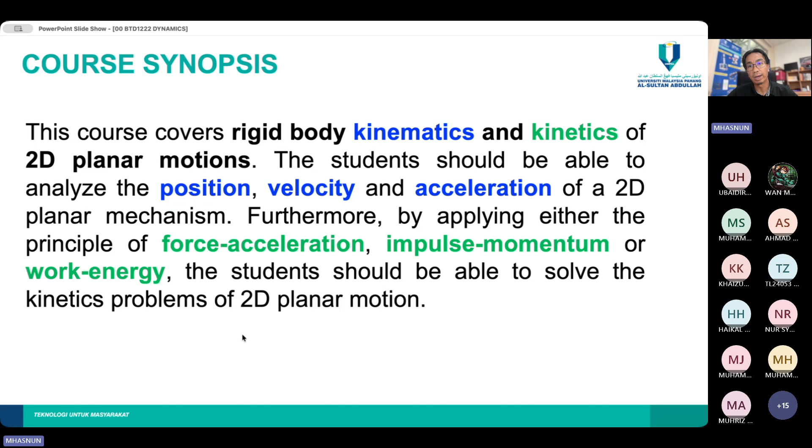If you read to the end, it says solve the kinetics problem of two-dimensional planar motion, meaning that in this class we will only focus on two-dimensional problems. We will not go into 3D problems. You will be calculating the problems in this class and in the test referring only to the X and Y axis. Basically, we are talking about two-dimensional problems.

As I mentioned earlier, this class is divided into 3 chapters, or course outcomes. The expectation is that when you finish dynamics, you will be able to understand and achieve these 3 outcomes.

The first outcome will cover kinematics, the character of motion. We will analyze linear velocity and acceleration of a point, and also angular velocity, which means the rotation component, and angular acceleration of the remaining links.

This is the difference compared to dynamics that you learn in diploma. Dynamics in diploma only involves linear velocity and acceleration, but in dynamics for degree level, we have another 2 parameters, which are angular velocity and angular acceleration.

Angular velocity is given by the symbol omega. It looks like a W, but it is called omega, a Greek letter. Angular acceleration is given by the letter alpha. Throughout the class we will see a lot of these symbols: linear velocity V, linear acceleration A. So you need to know V, A, omega, and alpha. These are the 4 main parameters that we will calculate in the class.

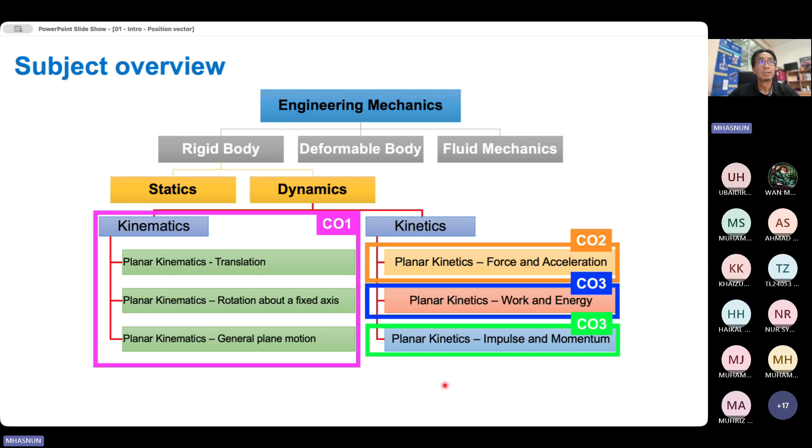Why do we learn rigid body planar motion? Because in many mechanical engineering branches, machines, or mechanisms involving engineering work, you can see such motion. For example, this is a simple planar rigid body motion where you have a rotating object, a rotating wheel.

And you have another point that is moving left and right. Altogether this belongs to planar rigid body motion. This cannot be treated as a particle because it has rotation and motion left and right—there's a wheel rotating. In particle dynamics, which you learned in diploma, there is no rotation motion.

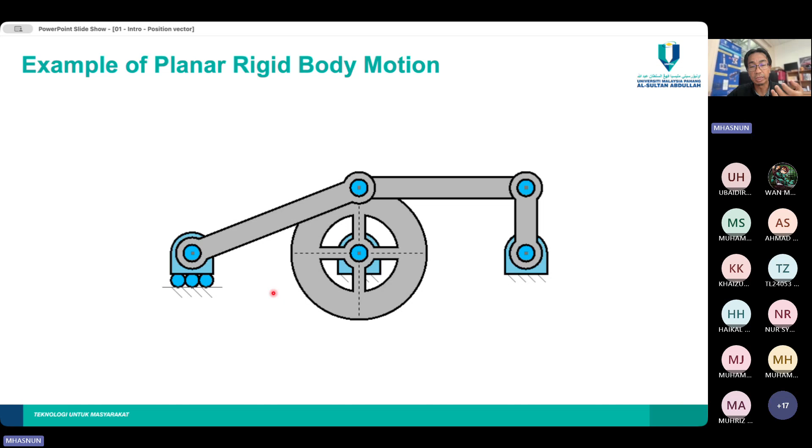Another example of this kind of mechanism is the crank motion in a car engine. The crank is moving up and down—the bottom part is rotating, this piston rod is also rotating, and the piston itself is moving up and down. This is similar to the motion shown in the previous slide.

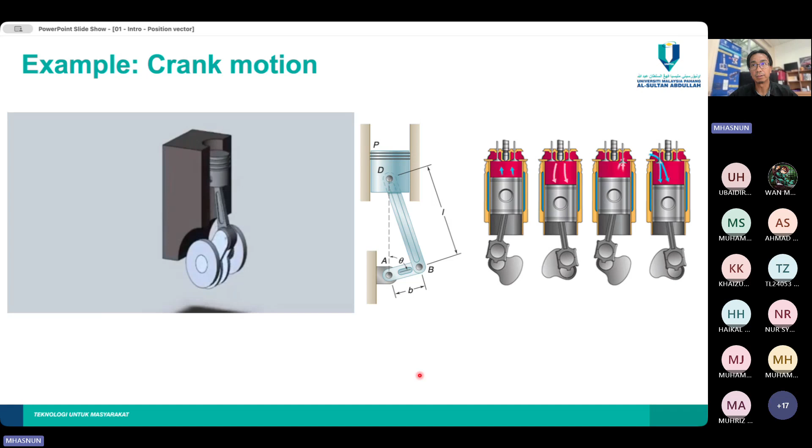So there are many motions in engineering machines that involve rigid body motion. That is why we need to learn dynamics.

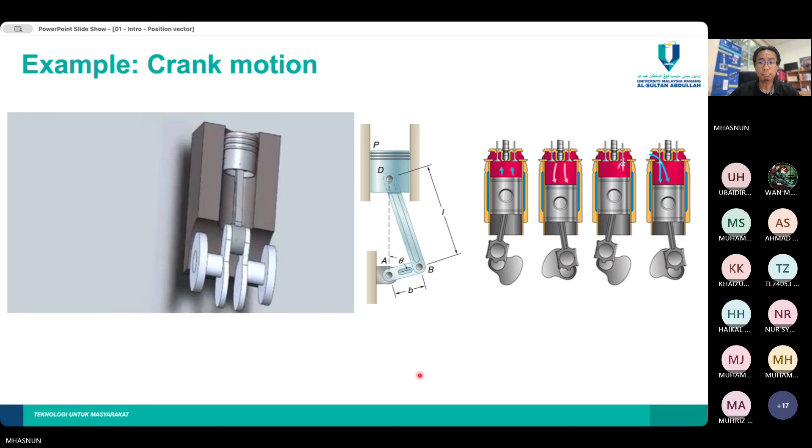Before we go into position vector, there are several things you need to be familiar with. The first and very important thing is trigonometry. I think you have learned this in mathematics, probably during your SPM, or maybe in mathematics at UMPSA.

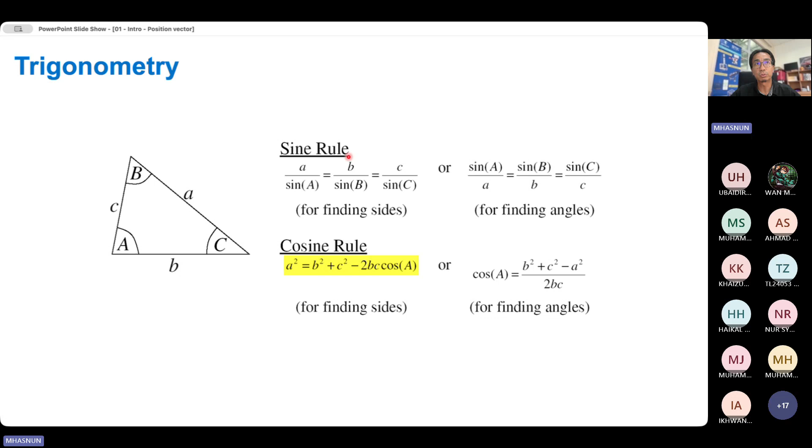So if you are making your notes now, please make sure you write this down. Sine rule is very important, Pythagoras theorem is very important, and trigonometric ratio is very important. All three rules are very important for you to get the length later when solving problems. Cosine rule is quite rare to be used in dynamics, and for finding angles you just flip the equation - also not very common. The most common one is using sine rule.

In this chapter we will also use a lot of vectors. I hope you know what a vector is. In mathematics or physics quantities, we have scalar and also vector. So what is the difference between scalar and vector? Any idea? Scalar versus vector.

For me, scalar has only magnitude, but vector has direction and magnitude. Both scalar and vector have value - value means the magnitude, a number like 10, 20, 30, and so on.

So that is the magnitude. But scalar, for example, we say velocity - scalar is 10 meter per second. But when we write vector, you will also put in the direction. 10 meter per second in which direction? To the right, to the left, going up, going down. So that is the difference between scalar and vector.

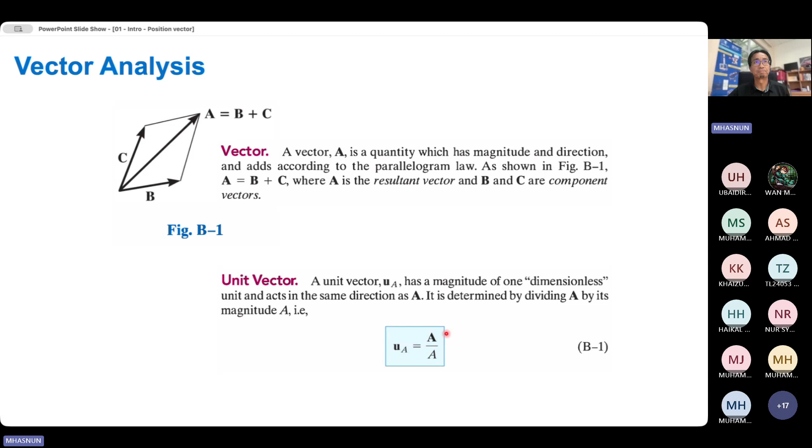So in the first chapter, we will use a lot of vector, because when you give a value - 10 meter, 10 meter per second, 10 meter per second square for acceleration, for example - we need to know what is the direction. So that is why we use vector in the first chapter. So you need to understand what vector is, and then you need to understand the unit vector.

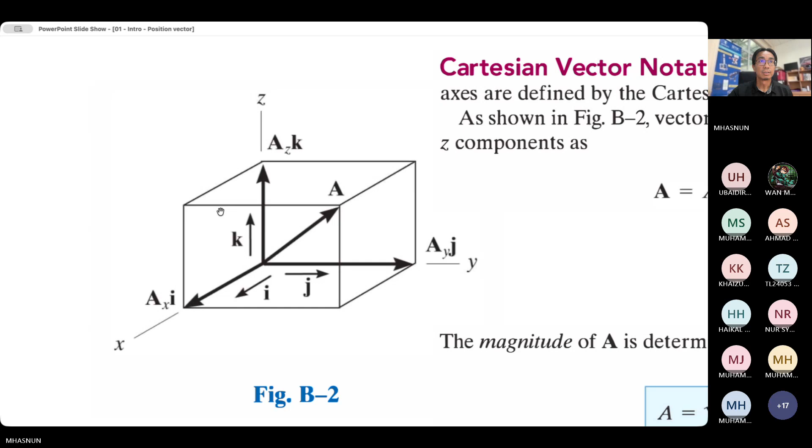Let me try to zoom it. If you see here, this is three-dimensional. So x-axis is in this direction, and the unit vector for x-axis is I. Unit vector for y-axis is J, and unit vector for z-axis is K.

So for example, if you say the velocity is 10I meter per second, it means the object is traveling 10 meter per second in x-axis, because it says 10I. But if scalar, you just say 10 meter per second velocity - we do not know which direction, whether it's in x-axis, y-axis, or z-axis. So scalar doesn't give you the full picture of what's going on.

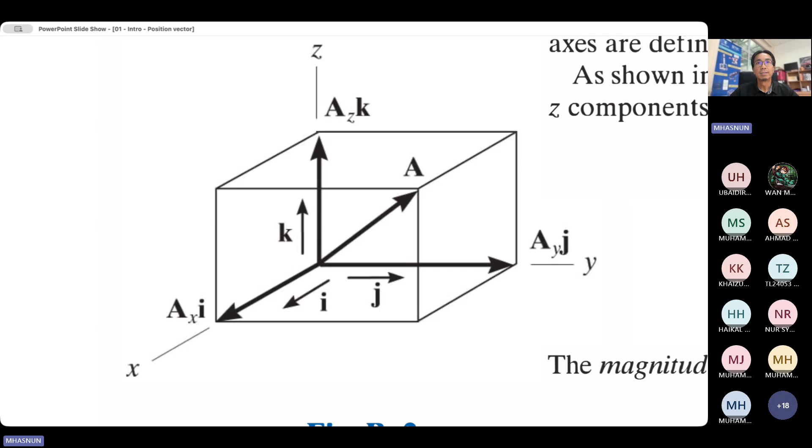But when we write the value in vector format, then we know the direction the object is traveling. So you write down 10J, meaning the object is traveling in y-axis, probably going upwards. So here is an example of how you write a vector: A is equal to AX times I, meaning the magnitude in x-axis is written with letter I, the magnitude in y-axis is written with letter J, and magnitude in z-axis is written with letter K.

I, J, and K is called unit vector. And when you write something, it is not necessarily only in one axis - you can also have vector in two components.

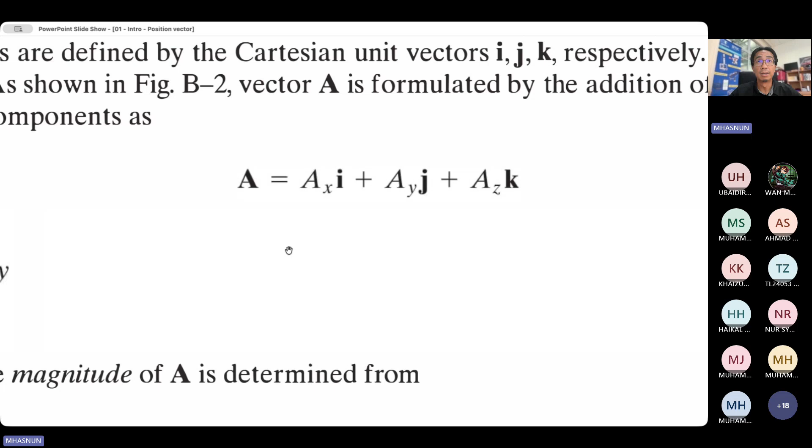For example, velocity of a car is 5I plus 3J, meaning the car is moving 5 meter per second in x-axis and also 3 meter per second in y-axis. So the car is basically traveling in a diagonal angle, because x-axis is to the right and y-axis is pointing up. So when you have two values, it is basically a diagonal motion. That is an example of how you write a vector's components.

And from a vector, you can calculate the magnitude. So if you have I and J, the velocity is 5I and 3J - how do you calculate the diagonal velocity? By squaring the x component, which is 5, plus the square of the y component, which is 3. So 5 square plus 3 square, then you square root it, and you will get the magnitude.

Maybe I will try to write so that you will understand better. So let's say we are talking about V, velocity V. Sorry for the bad handwriting, I'm writing with my trackpad. So V is, let's say, 5I. The unit vector is written like this - when we write on paper, it's written with I, and there is also a hat, like a cap, on top.

Because if you write with a computer, you can write it with bold typeface. But if we write on paper, how do we make it bold? So when you write on paper, normally you will write it with the hat symbol to indicate that it is a unit vector.

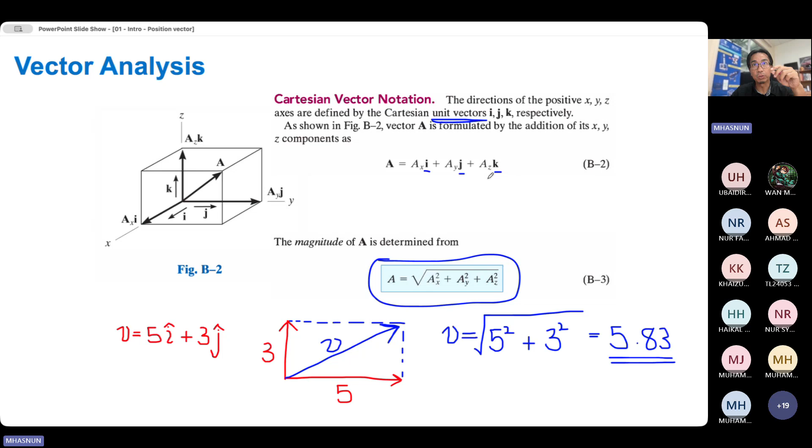This is vector analysis. The important thing you should know is I, J, and K, which are called the unit vectors. Most commonly we will use I and J because of X and Y, and there is also some calculation in chapter 1 that will use K as well. You also need to familiarize yourself with calculating the magnitude of a parameter. When you write a vector to calculate the magnitude, it means this one. To calculate the magnitude, you use this formula: square of every component, square of X, square of Y, square of Z, and then square root everything, and you will get the magnitude.

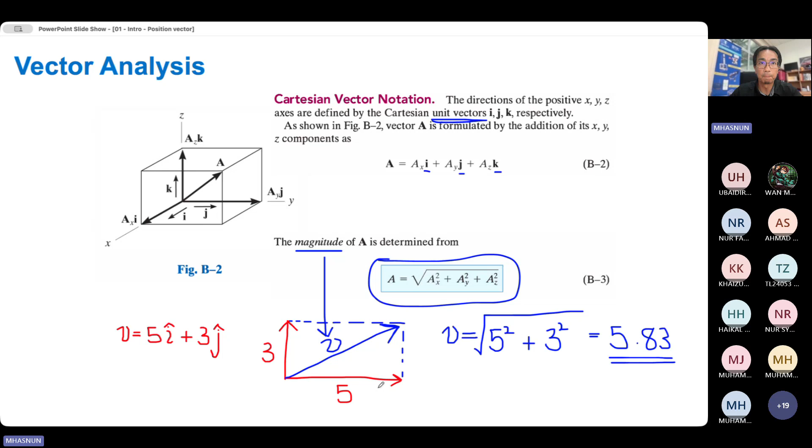And this is not really important.

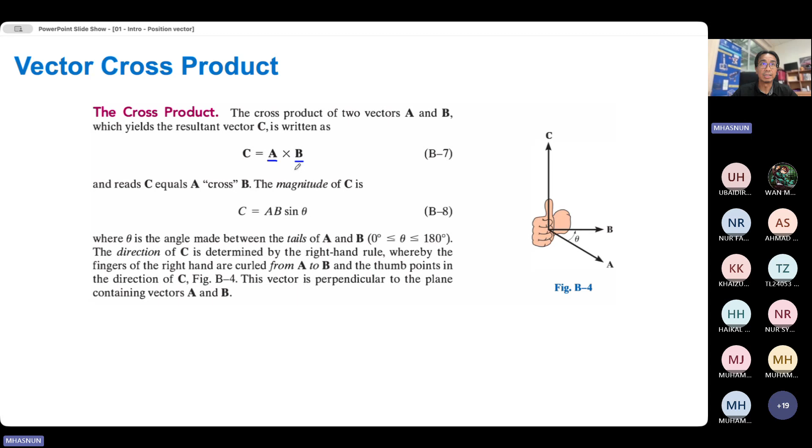The cross product is also very important. Later we will learn about cross product, but I don't think I will cover that today. For example, you have vector A multiplied as a cross product with vector B. It is not simply multiplying, like if A is 5 and B is 3, you multiply 5 and 3 to get 15 - not like that. In vector, there is a specific way to do the cross multiplication. We will cover it later in class, vector cross product. So I will skip this for today and cover it later.

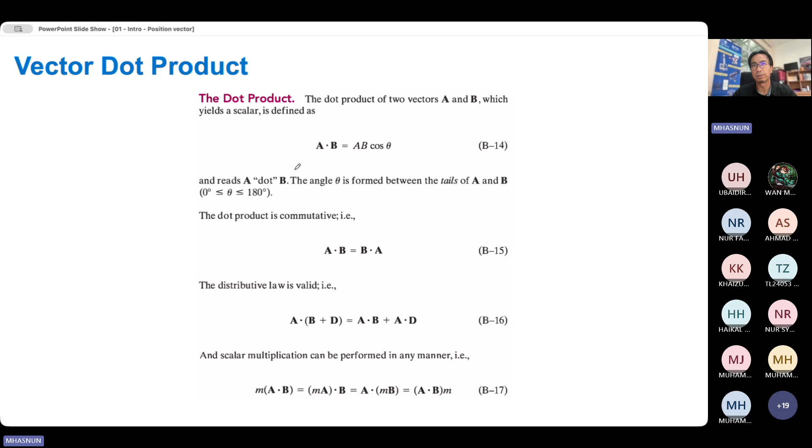And also vector dot product, but this is not really useful in dynamics. We are not really using this a lot, so it is just for you to know, but you will not use it in this class.

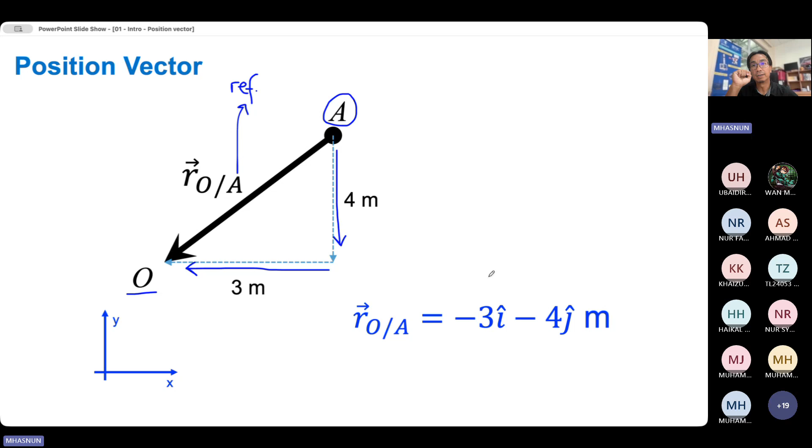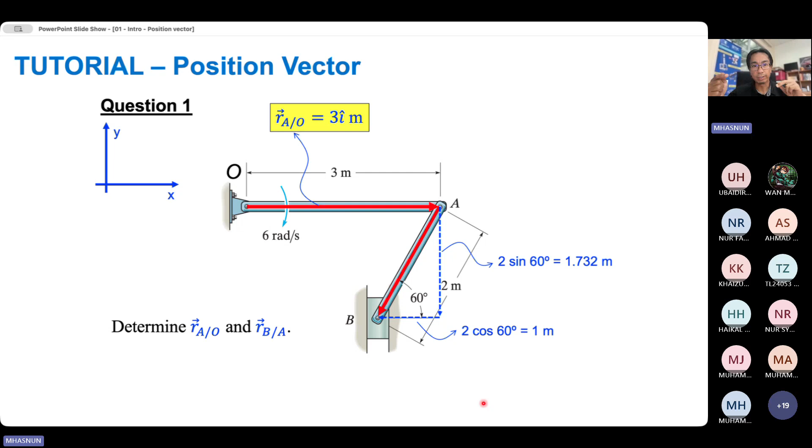But you forgot to mention the unit vector, so we don't know which direction -1 is in. -1.732 in which direction? That is why unit vector is also very important. So you write -1I because -1 is in the x-axis to the left, so it's negative. -1I, and then 1.732 downwards in the y-axis is also negative. So negative 1.732J. This is how you write RB/A: -1I minus 1.732J. At the back put the unit, meters, because unit of length is meters.

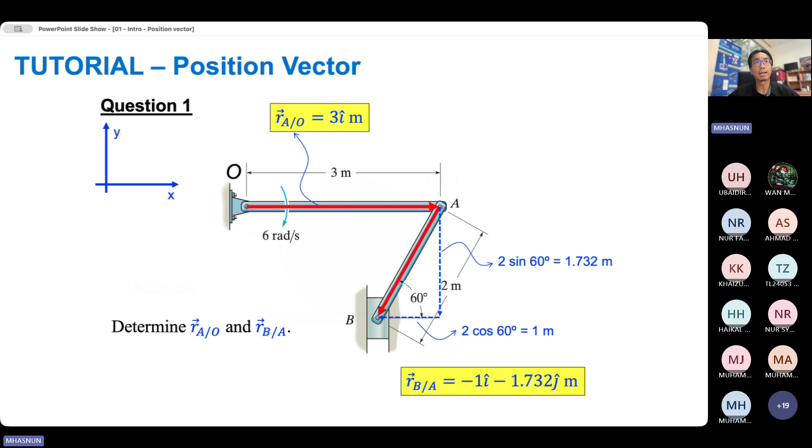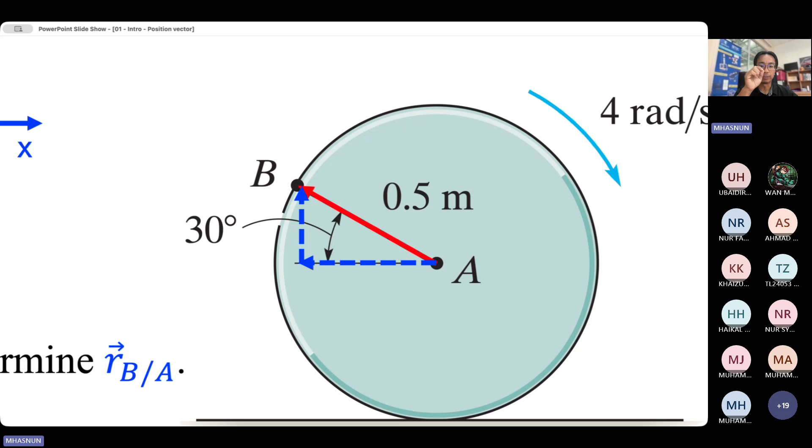So the horizontal component, x-axis to the left, how do we calculate? 0.5 multiplied by what? Multiplied by sin 30 or multiplied by cos 30? Which one? Cos, cos 30, good. This comes from the trigonometric ratio earlier. So 0.5 cos 30 for the horizontal component, which is the x-axis, you will get 0.433 meters.

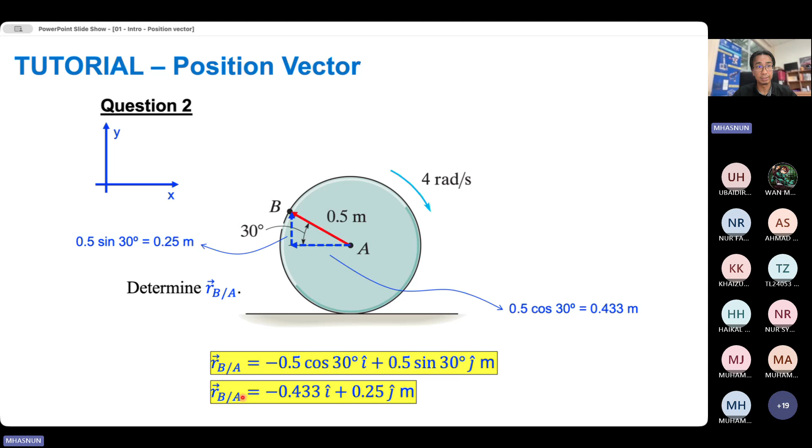And then for the vertical component, if the bottom one is cos 30, the vertical will be 0.5 sin 30 degrees, you will get 0.25. Combining both, X component is to the left, which is negative, but Y component is upward, so positive. So you will have RB/A negative 0.433I plus 0.25J. This is the position vector, position of B with respect to A.

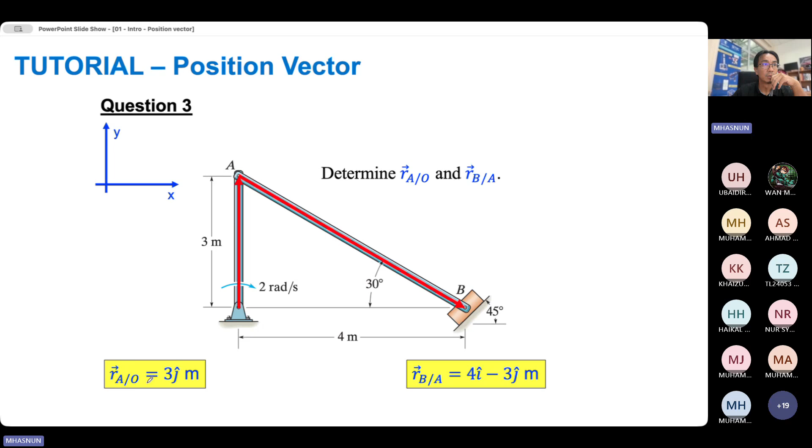pointer, pen color, saya ambil, okay, green lah, right. So, your X component will be this way, sampai ke B. This is your X component. Dia adalah sama panjang dengan 4 meter ni lah. And then your Y component is pointing down, pointing down to B. And the length is sama dengan 3 meter.

So, straight away, without having to calculate, you will get 4I positive. Tapi 3J is negative because it is pointing downwards. So your goal is when you have your position vector diagonal macam ni, you need to get the triangle. So bila you lukis triangle ni, you akan nampak what is the I component and what is the J component. Okay, so maybe the last example for today, and the tutorial that I have shared with you, you will try to do it at home.

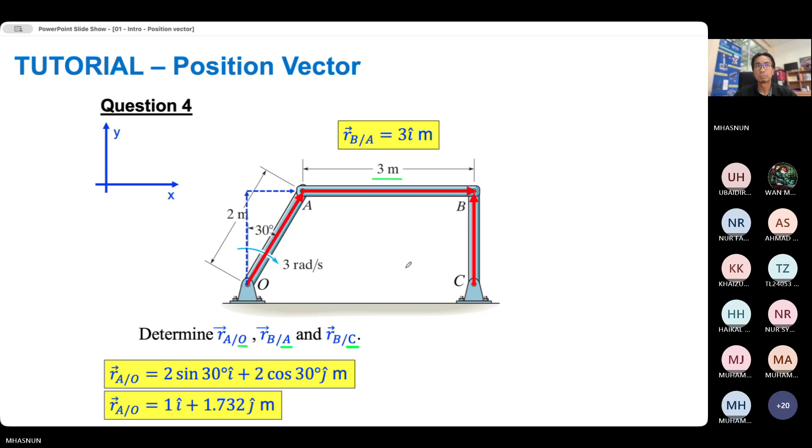2J. Mana dapat 2? 2 here is the OA, yang saya ingat tu. So, BC punya panjang is basically sama dengan panjang ni, kan? Sama dengan panjang this component, which is the J component, yang ini. 2 cos 30, which the value is basically 1.732. So, this is basically 2 cos 30 and equals to 1.732J. So be very careful, jangan tersilap ambil value 2 ni, because 2 meter ni adalah yang diagonal punya component.

Okay, alright, so any questions so far? We have done about 4 questions on position vector. We will continue the rest. Ada a few more tutorials, I have also given you in the WhatsApp group. So try to do the position vector at home. In the next class on Wednesday, kita akan sambung with the answers of the tutorial position vector, and we will continue with the actual calculation on the problem. So now kita hanya belajar the position vector. Later we will see when the object is moving, how do we calculate velocity of point A, velocity of B, what is the rotation, and so on. So any question before I end the class for today?

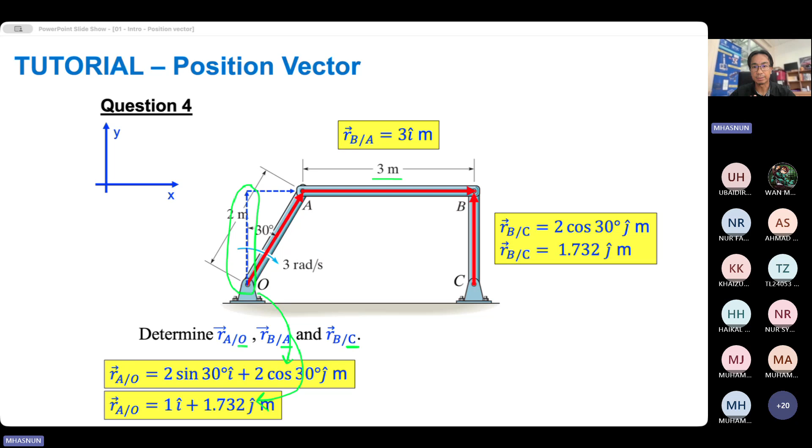Wassalam. Thank you, sir. Welcome. Waalaikumsalam. Thank you, sir. Thank you, sir. Waalaikumsalam warahmatullahi.